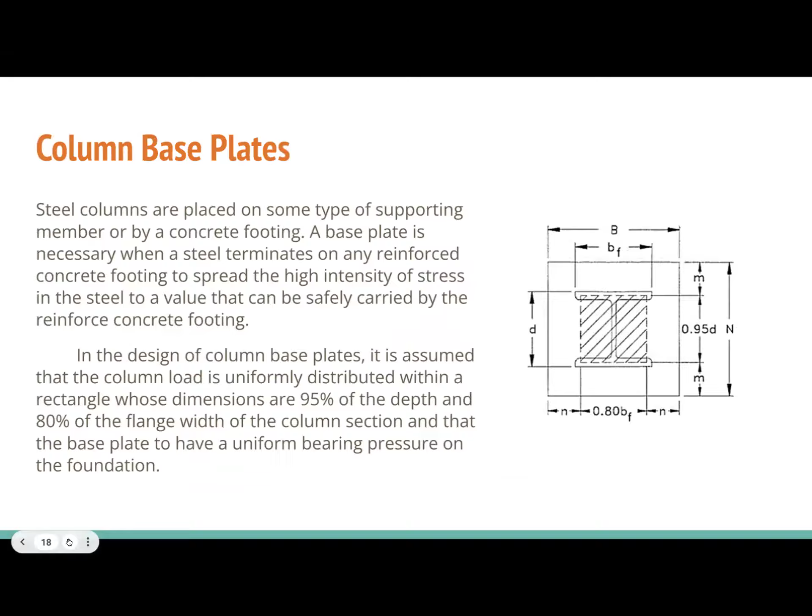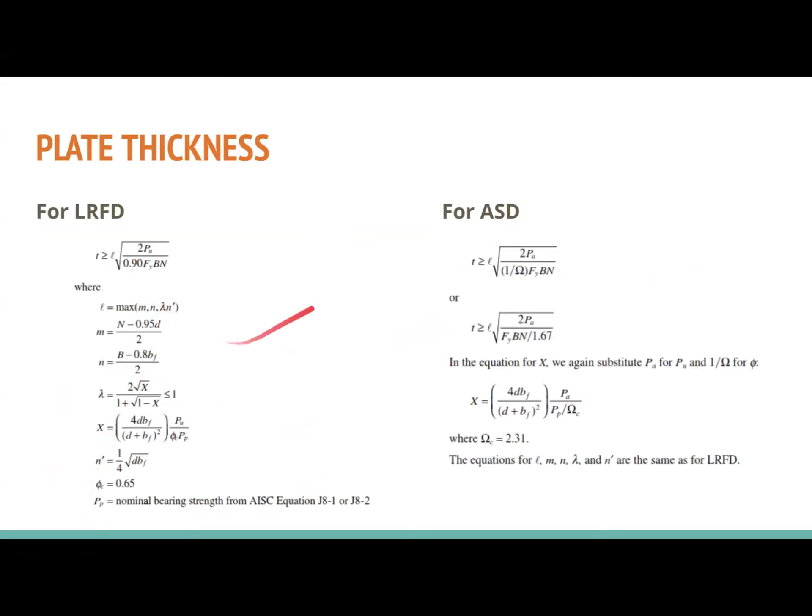So now we'll have an example. All right, so we'll solve this one. So we have this here, the problem. Let's solve this manually. A W250 by 73 is used as a column and is supported by a concrete pier. The top surface of the pier is 450 mm by 450 mm.

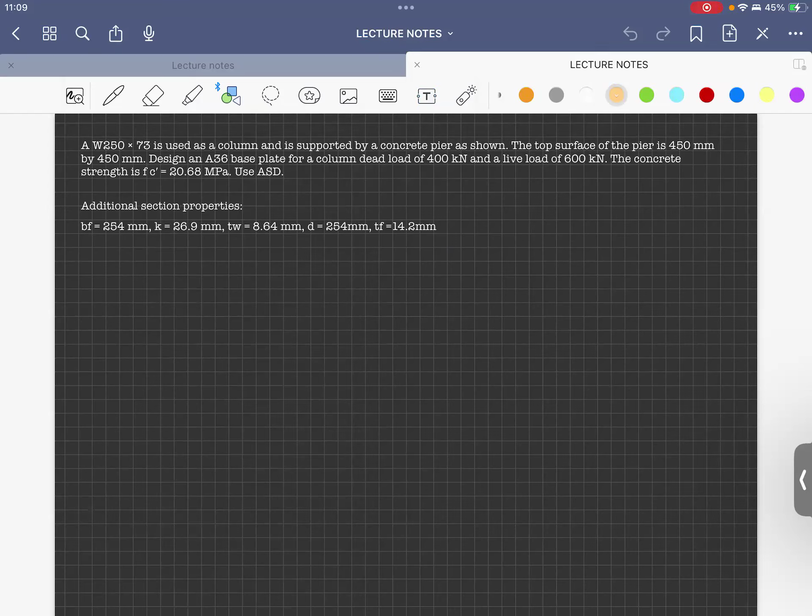The dimension of the concrete pier is already given. So let's draw yung ating concrete pier. So 450 by 450, say ganito. So 450 by 450 concrete pier. 450 by 450.

Then design an A36 base plate for a column dead load of 400 kilonewton and a live load of 600 kilonewton. The concrete strength is FC prime 20.68 megapascal. Use ASD.

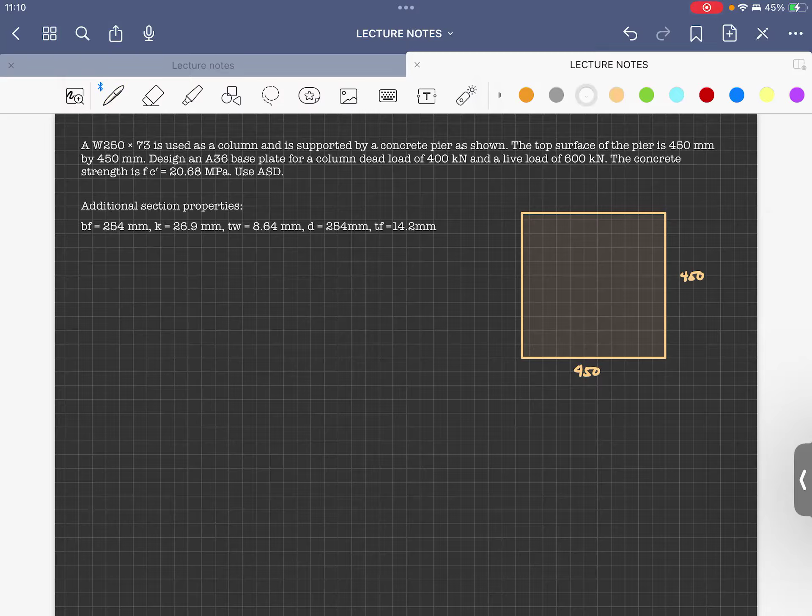So since this is ASD, what we're going to use is the PA or allowable load. So you don't need the load factors. For your PA, just change the values. We have PA. We have 400 plus 600 kilonewton. So we have 1,000 kilonewton. So this is the allowable load.

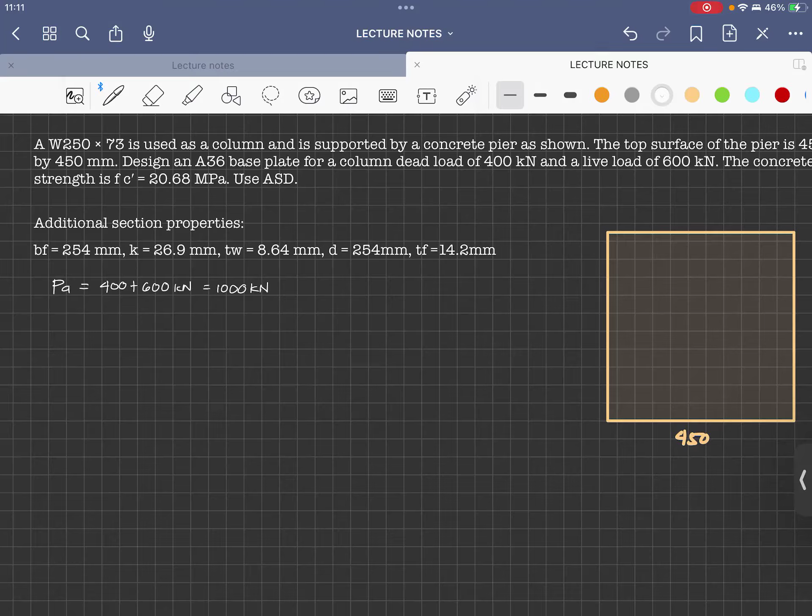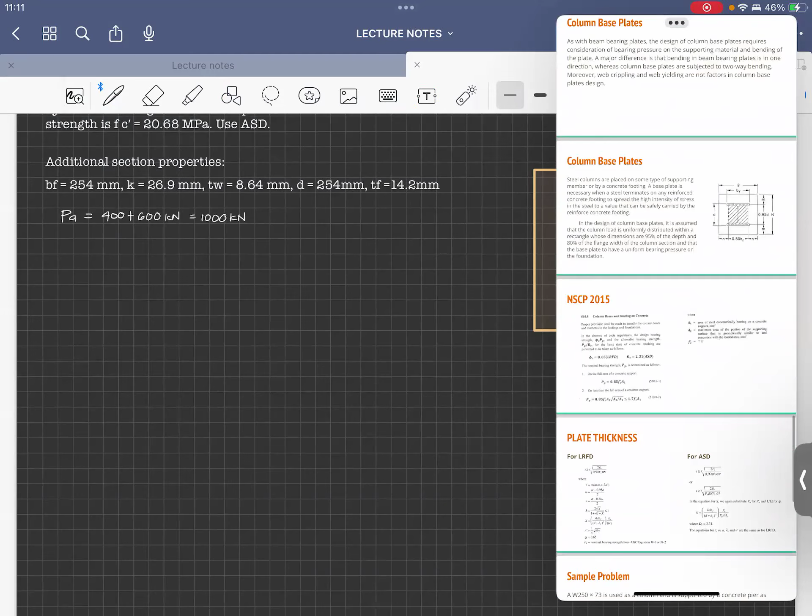Now, to solve for the area, balikan po natin yung ating presentation para may guide tayo. Tingnan natin, column base plate. So if you can see here, ayan. Since we have the area for your concrete, what we need naman is the area for your column base plate. So ang gagamitin natin is the second, less than full area of the concrete support. Since we have ASD, sulat natin.

We have PA is equal to, I'm just going to copy this first, 0.85 FC prime, area 1, square root of area 2 over area 1. Now for this to be PA, I'm going to divide this by your omega. So for your PA, we have 1,000 kilonewton, or 1 times 1,000, or 1 million Newton. Dapat kasi naka-Newton siya, is equal to 0.85 FC prime is 20.68.

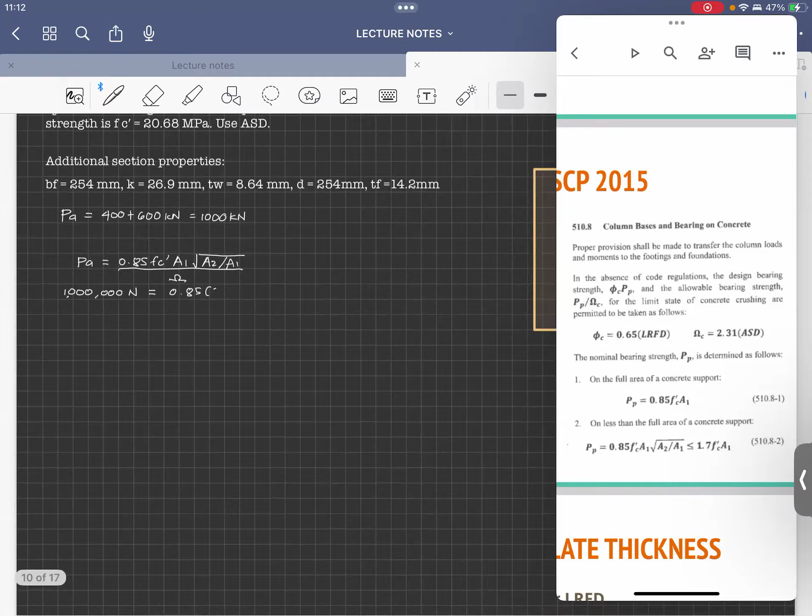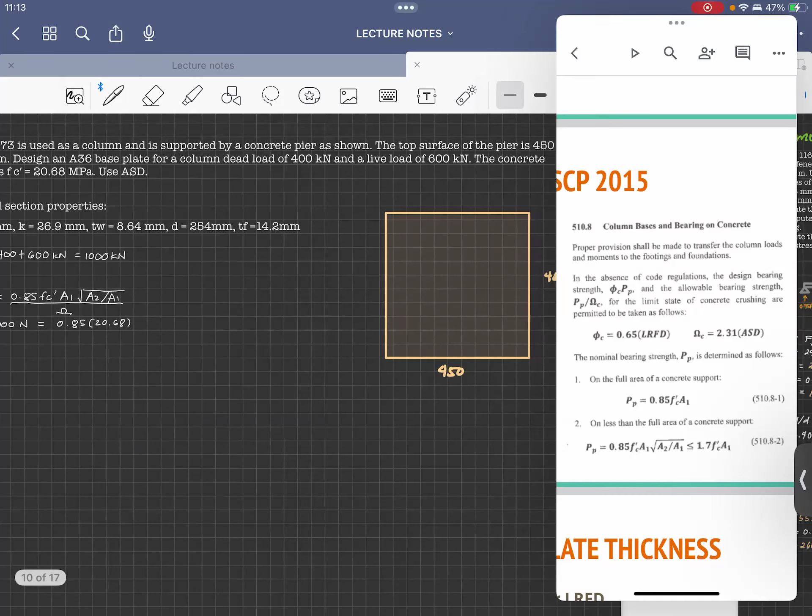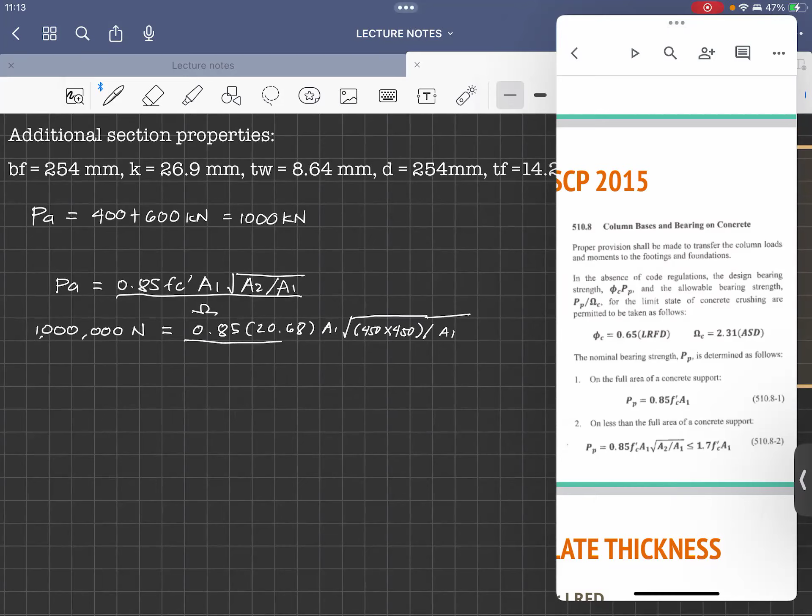Lagyan natin. Area 1, this is what we are trying to solve. Since magdi-design tayo, we need the area of the column base plate. Kasi di ba, we have here na the area of the concrete, so what we need is the area now of the column base plate. So area 1, ito po yung nawawala. Square root of area 2 is the area of the concrete. So area ng concrete is 450 by 450. Then i-divide natin ang area 1. Tapos this equation is divided by our omega, which is equal to 2.31.

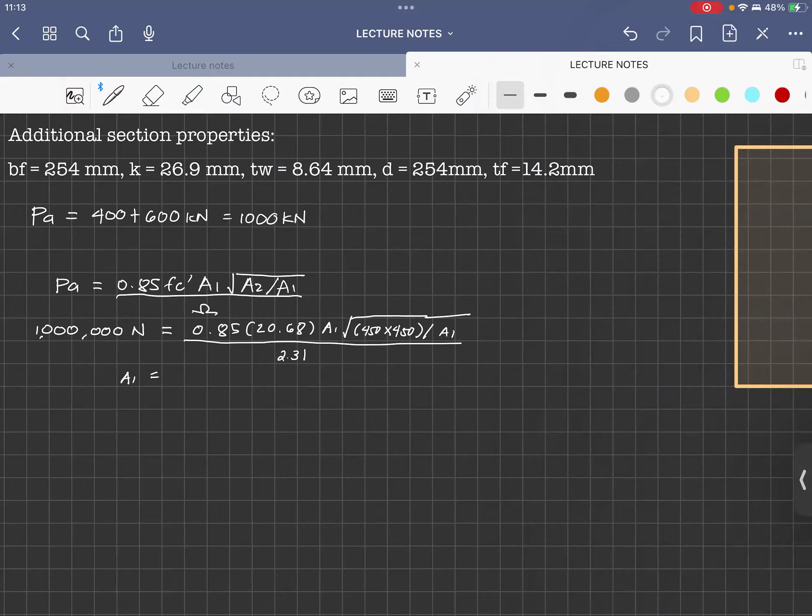So use your calculator to solve for your area 1. Million times 2.31, para diretso tayo. 0.85, 20.68, square root of 450 times 450.

So we have 85,282.52. Now let's see. Let's please take note here. The value of this should be

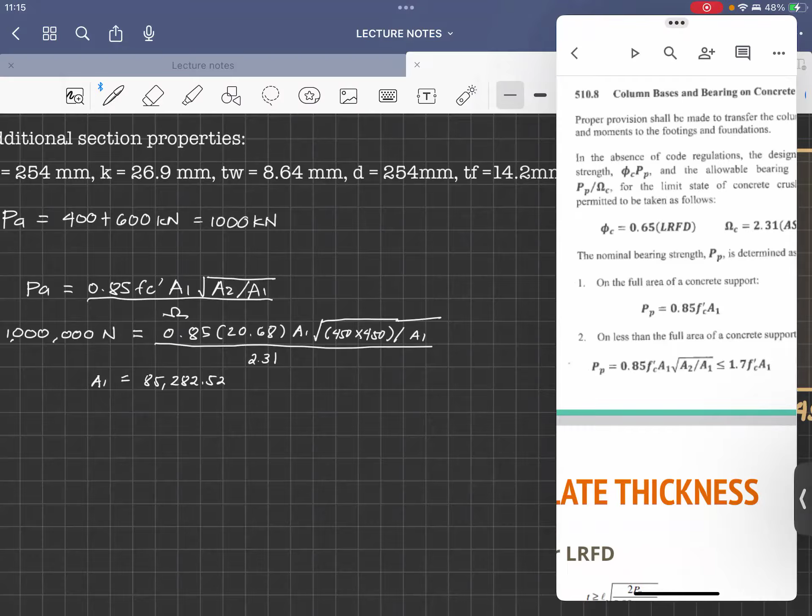less than or equal to 1.7 FC prime A1. So since this is our A1, let's check. To check, we'll use 1.7 FC prime A1. So for A1 we have 1.7 times FC prime, 20.68, so let's put 1.7 FC prime A1 here first.

Do not forget, this will also be divided by your omega. So, 20.68 times area 85,282.52 divided by omega, which is your 2.31. So we have 1.7 times 20.68 times 85,282.52 divided by 2.31.

129. Let me double check. So 1.7, 20.68, 85,282.52 divided by 2.31. So it's quite large.

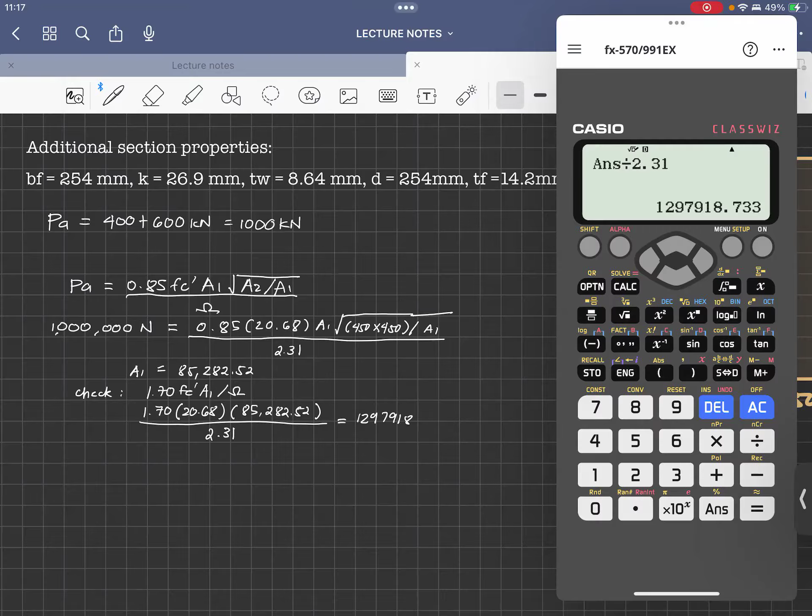1,297,918.733. So let's go back here. Since it's large, this is greater than your PA, which we'll set as 1,000. So 1,297,918 is greater than your PA, which is 1,000. So check, correct siya.

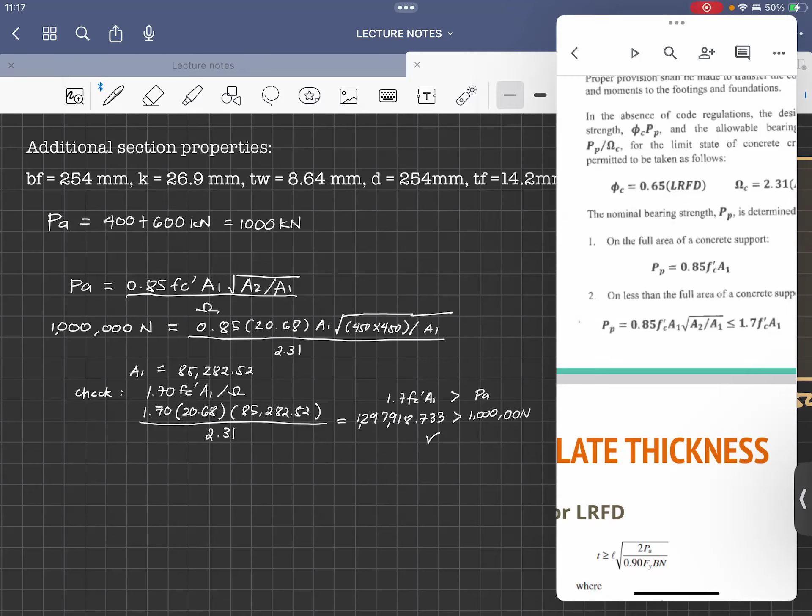Okay, so we have 1.7 FC prime A1 is greater than your PA. So that's our check. Based on this equation, so it's correct. Another thing you need to check is this is in mm squared, so that would be the area of the base plate.

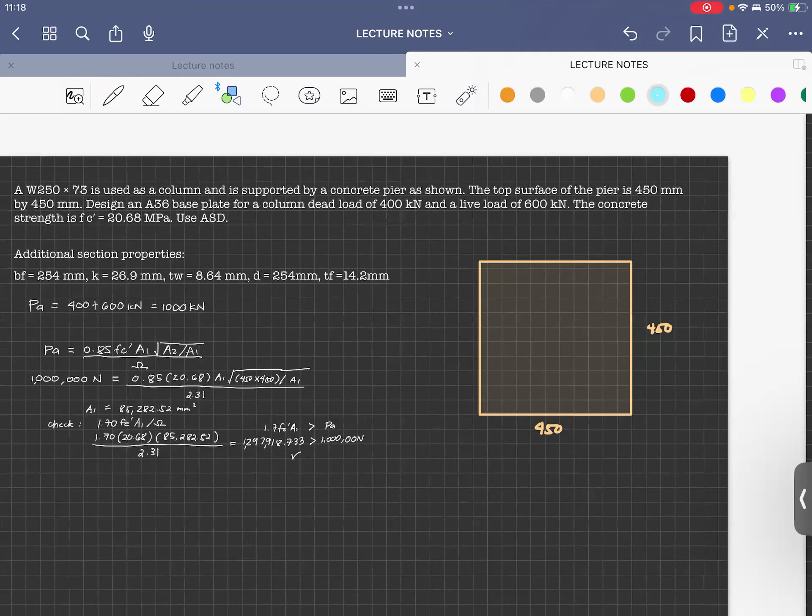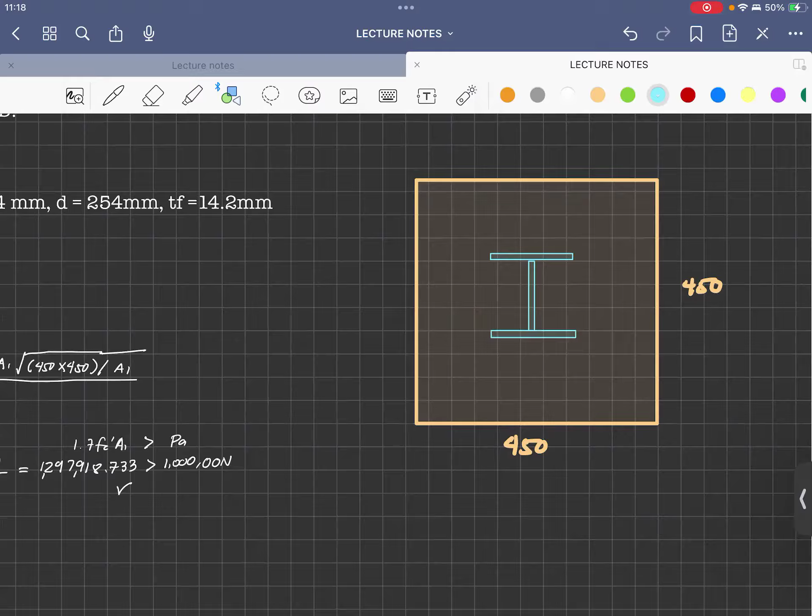So if we look at this, if we are to draw the I section, the BF is 254. Let's do the I section. If this is our cross-section or area of the base plate, or the column base plate, it should be greater than the area of this, because this should be the shape of our column base plate. Let's check.

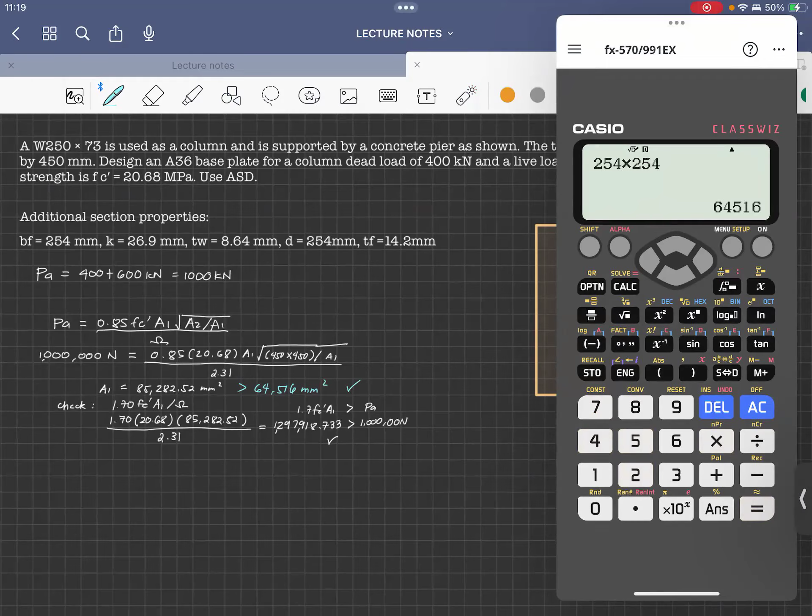So we need to multiply BF and then D, just to check. Your BF is 254, your D is also 254. So, squared, that's 64,516. So it's greater than this, 64,516 mm squared, so it passes. Again, what's the 64,516? That is the area of your column.

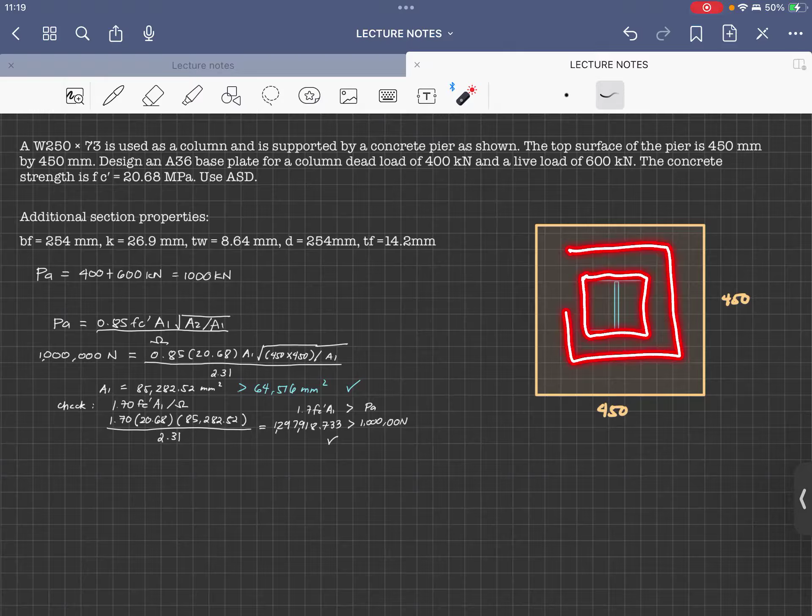So again, if we want to distribute the load of the column, our column base plate should be larger than the area of our column. So since 85,282.52 is greater than 64,516, it's correct. Check it here.

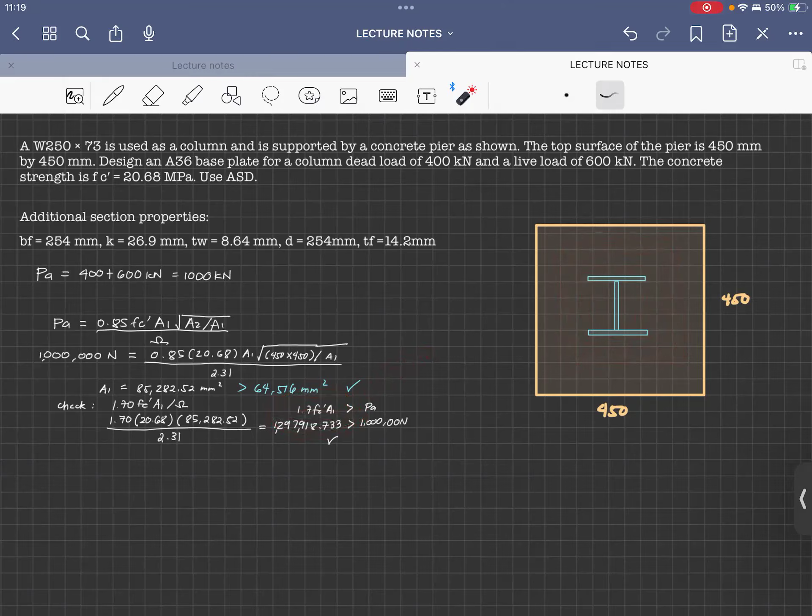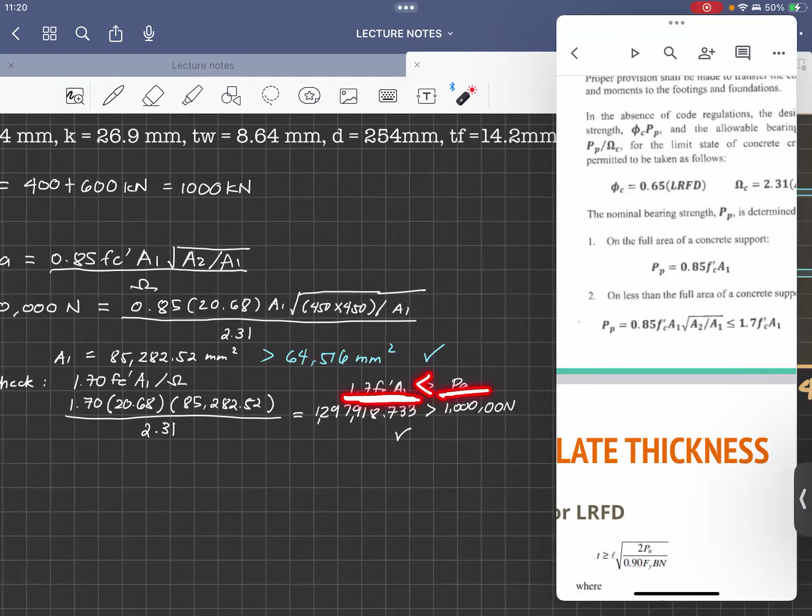Then you also need to check it here because this is in our code. So another thing, what would happen if, for example, our answer here is less than PA? Because that's what's in the code. Let's go back. It should be that 1.7 FC prime A1 is greater than our PA. So if it's smaller, what do we do? What we do is, instead of using this to get your A1, we replace it since it's wrong. We make PA equal to 1.7 FC prime A1 over omega.

And then we compute the new area 1. So if it's smaller, or the equation isn't satisfied, we equate PA to 1.7 FC prime A1, and then the area there would be the area that we need to use. That is how we double check if it's okay.

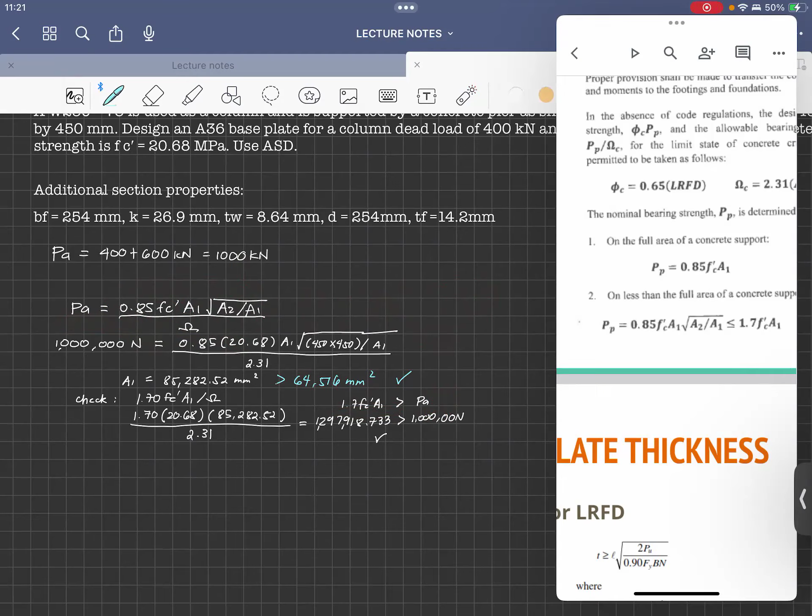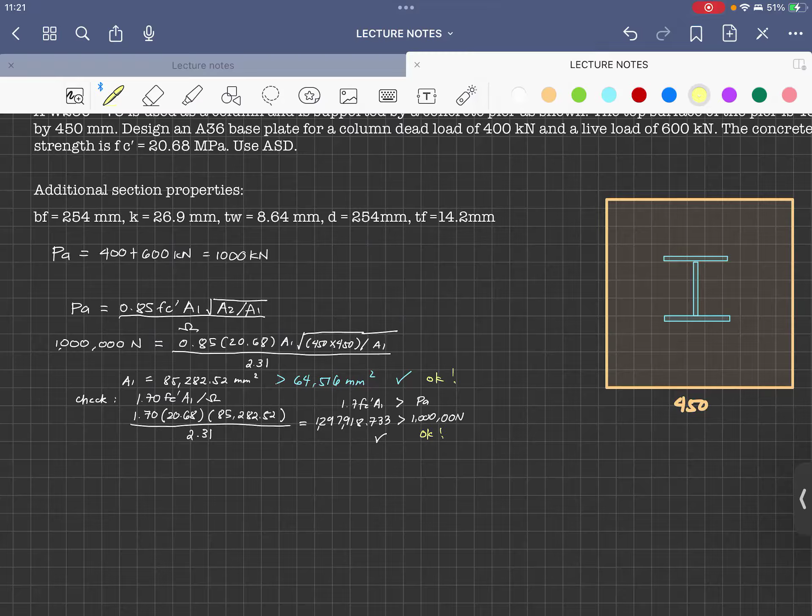So let's mark it okay. So this is okay, then this is also okay. So if that's the case, and we have the area, we can now try. So let's say, since it's square, square root of 85,282.52 is equal to 292.

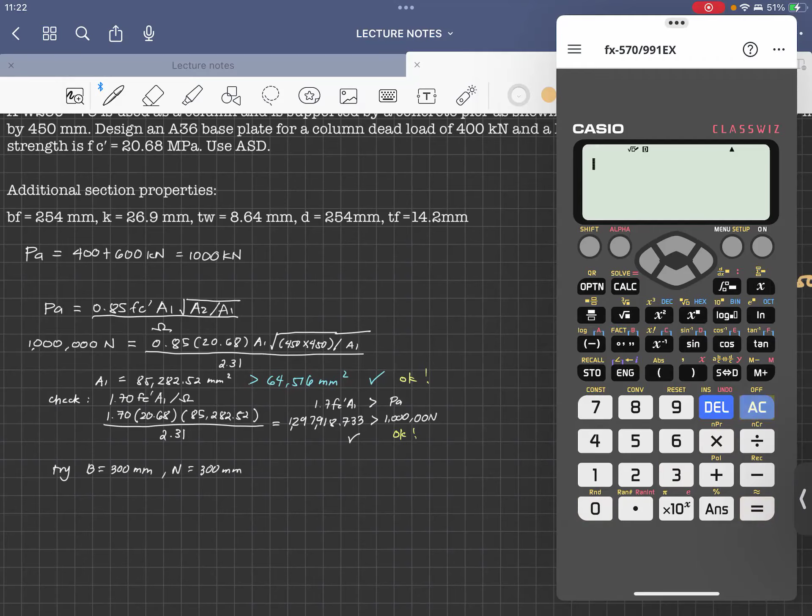So let's say we make it 300 by 300. Try B equals 300 mm, and N also equals 300 by 300 mm. Alright, so it passes. 292, so let's try B and N. If we make the area 300 times 300, of course it's also greater than our 64. So it still passes. So 300 by 300, that would be the dimension.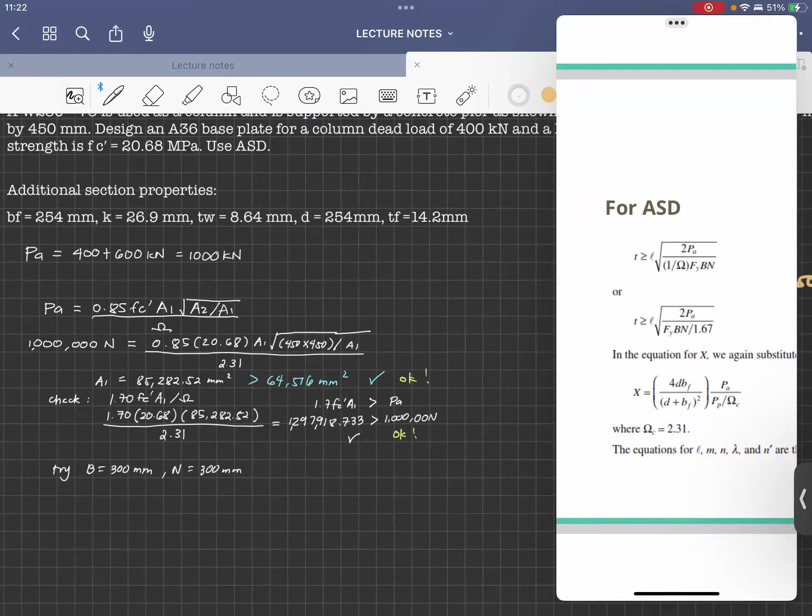Next step now is solving for your T. So, we're in ASD. Again, what we need to solve first is this letter L. So we're going to choose among our M, N, and N prime. Let's go back.

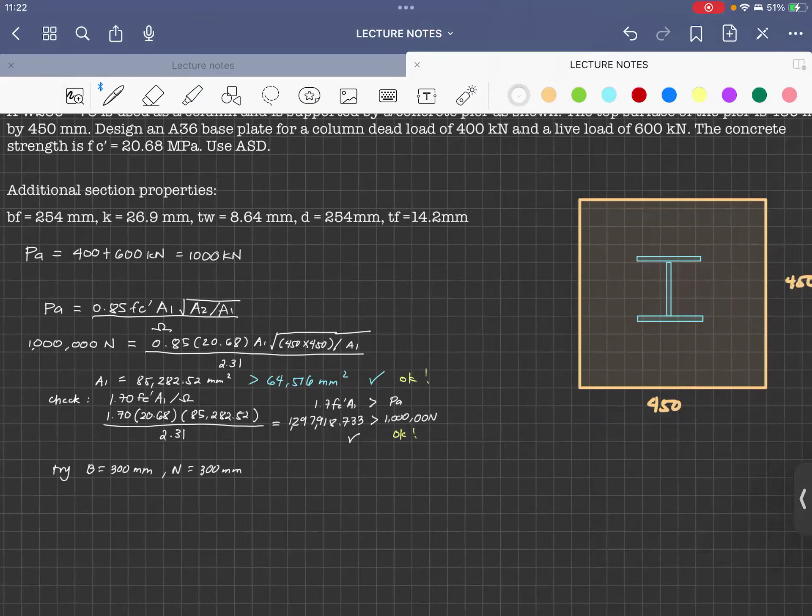So again, as mentioned earlier, instead of memorizing, it's better to just draw our figure. So here, let's put in the dimension. We have your BF, that is 254, and this is also 254 depth. Now I'm going to draw a line, 0.95 D and then 0.8 BF.

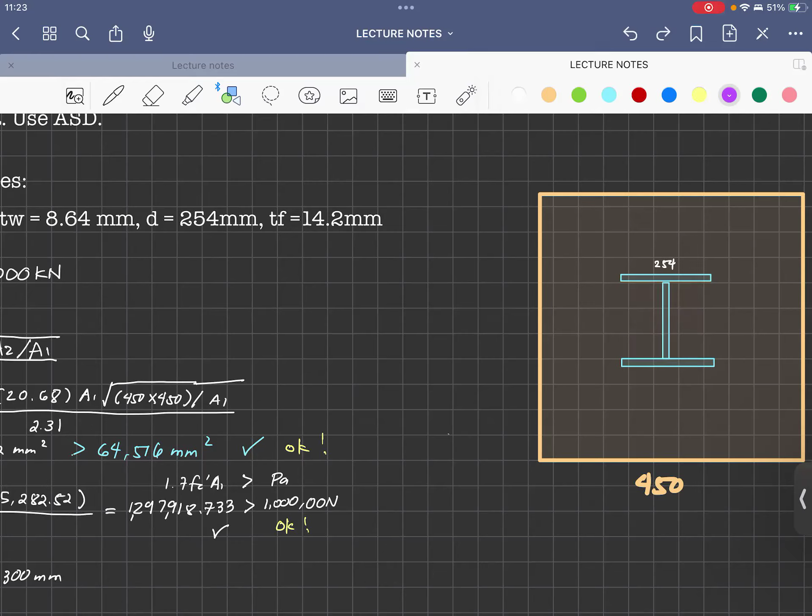Sometimes, supposedly, let's say this is it. So you have this.

Then let's draw the base plate, 300 by 300. And this is 300 by 300.

So if you remember, our depth is 254. So this is your D. Then, in terms of D, that's it.

So parallel to our D is your N. Then parallel to our BF is your B. This is your B. And this is your BF.

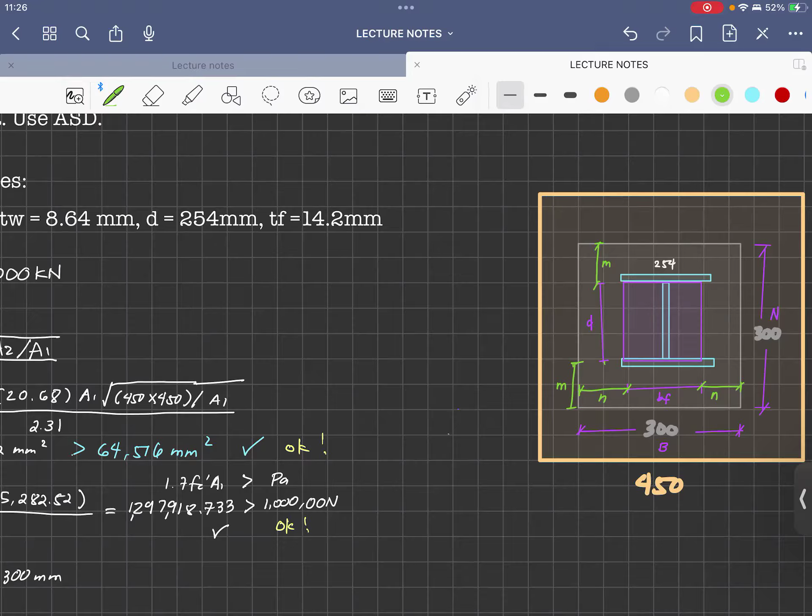So, to solve now for the value of M and N, without using the equation, let's just look at the figure. Let me move this to the other side. So let's compute, for example.

Let's compute for your M. To compute for this value, what we do is 300 minus D, and then divide it by 2 to get your M. So you have

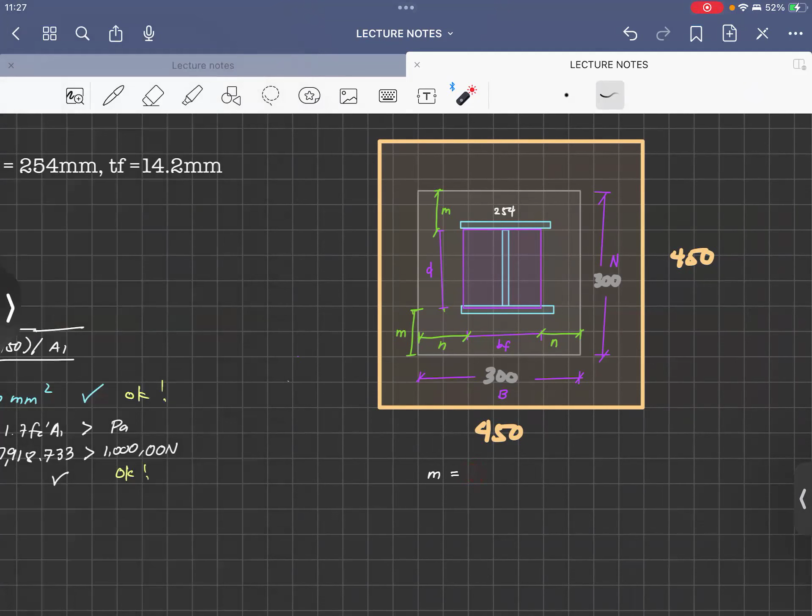300 minus your depth, which is 254, divided by 2. So that is your M. So you have 23 mm.

Then for your N, the same process. To get these, what we do is our B, which is 300, subtracted by BF, then divided by 2 to get your N.

So the same value actually, 300. The BF is also 254, divided by 2. So the same value actually, you also have 23.

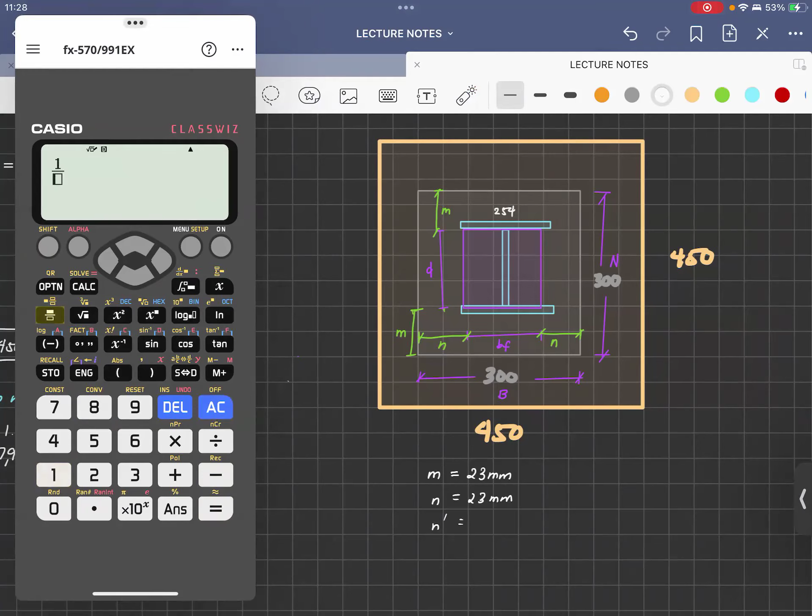And then the other one is N prime. So you have 1/4 square root of D times BF, so 254 times 254. That's the equation. So you have 63.5.

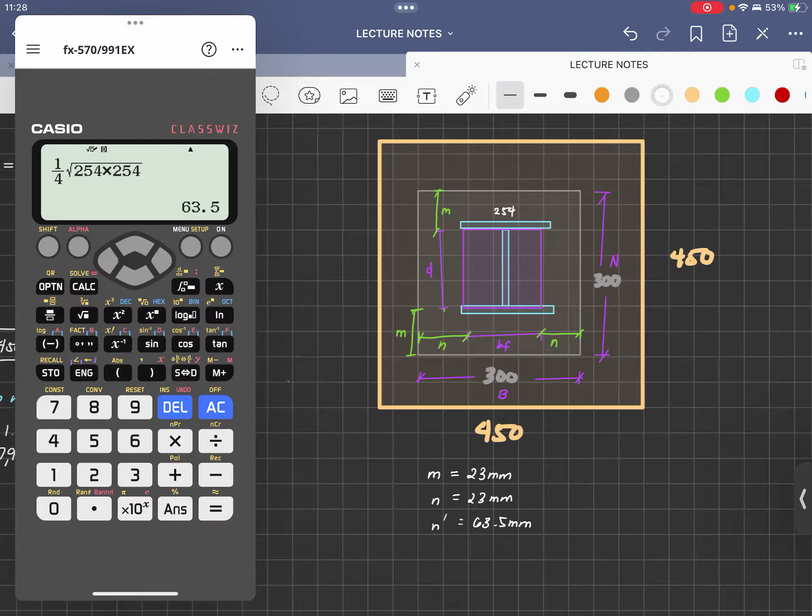Again, according to the NSCP code, we need to choose the maximum value. So in this case, the larger value is your 63.5. So that's what we'll use.

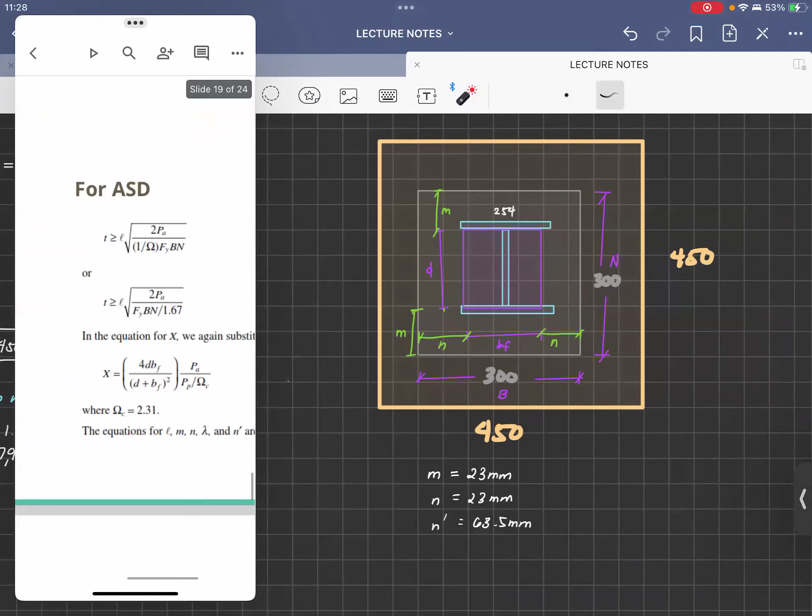So for the thickness, let's write it here for your T. So we're going to choose this 63.5 as your L. So let's copy the value of your T.

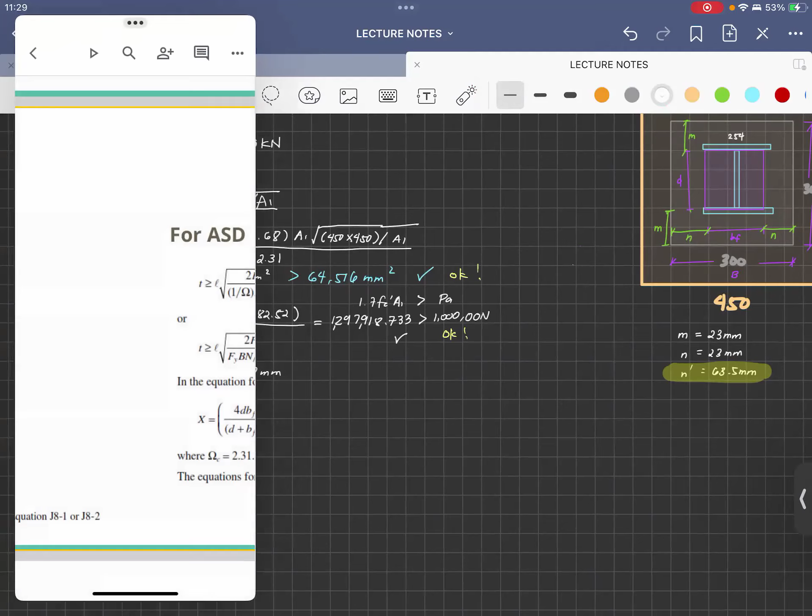So for your thickness, we have the equation, let me put it here again. So you have T is equal to N prime times square root of 2PA, all over FyBN, divided by 1.67.

I'm going to write it. N prime is 63.5, square root of 2. Your PA is 1,000 kilonewton or 1 million newton. All over Fy.

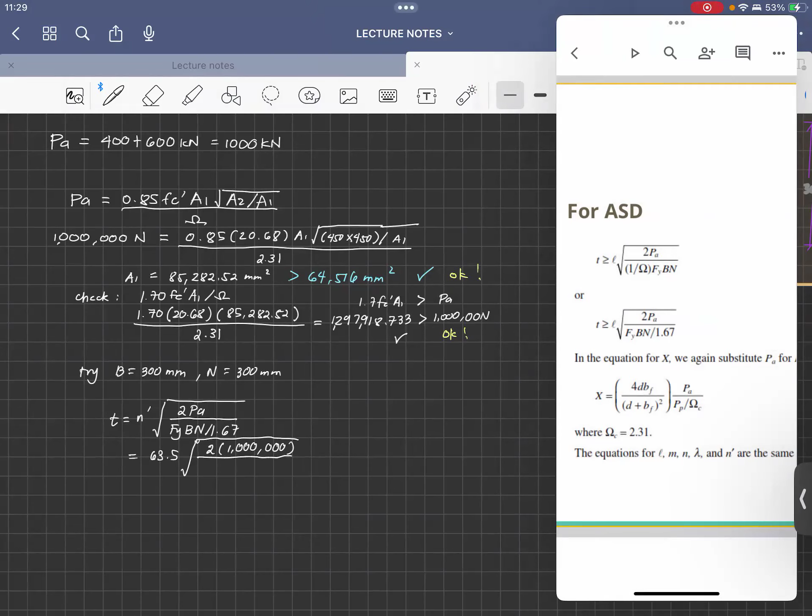Let's see, this is A36 grade steel, Fy is 248. Your B is 300. N is also 300. And then divide by 1.67.

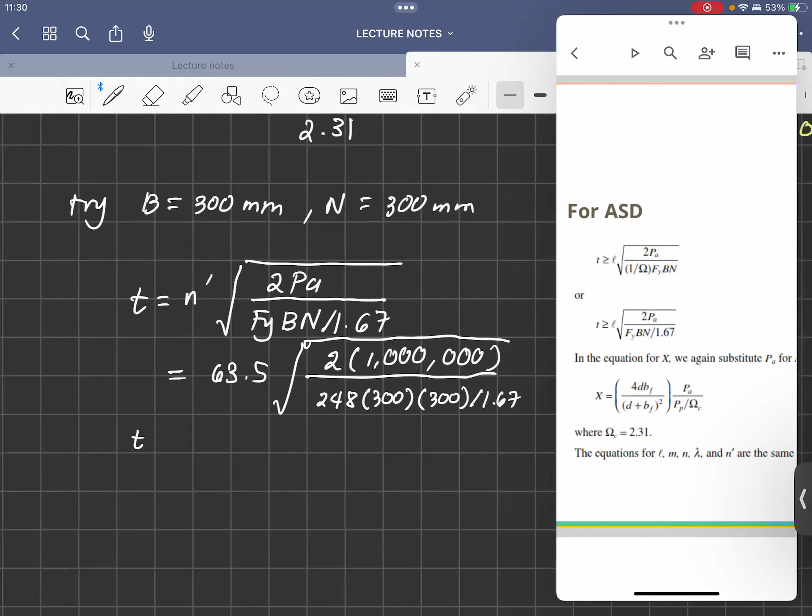So the value of T is equal to 63.5 times square root of 2 times 1 million, divided by 248 times 300 times 300, divided by 1.67, which equals 24.56 mm. So what we'll do is round up to the nearest multiple of 2.

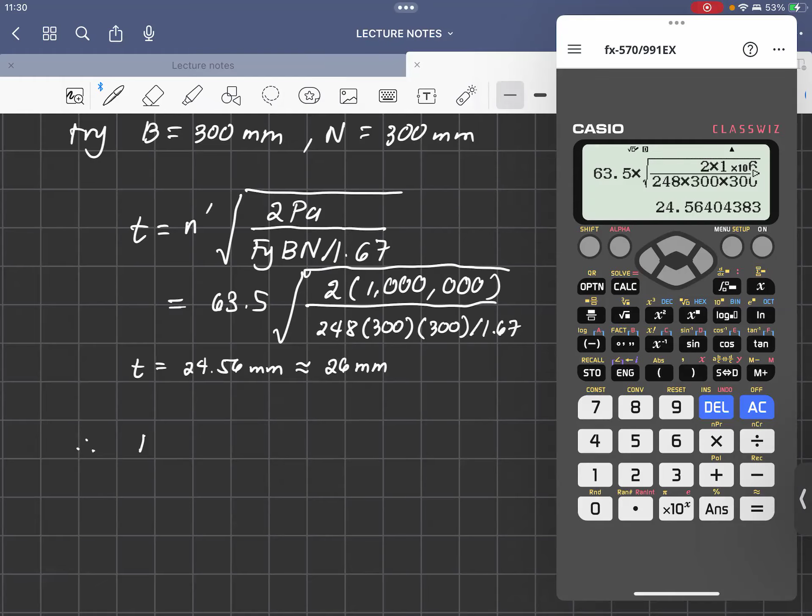So let's make it 26 mm so it's a whole number. So therefore, our base plate is 300 by 300 by 26 mm. This will be the dimension of the base plate that can carry the 1,000 kilonewton load.

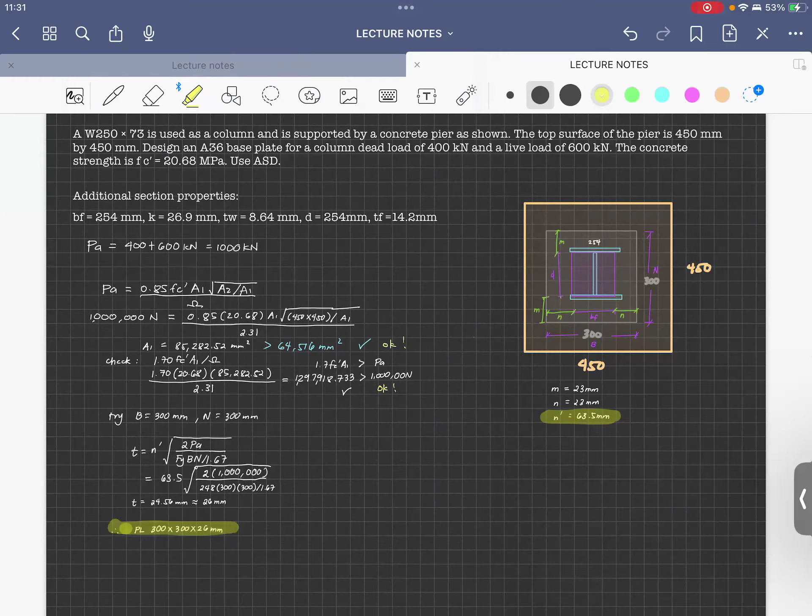So that's our final answer. So that's the dimension of this base plate in gray. So 300 by 300, and the value of your T is 26. If it's not square, just ratio it.

For example, if it's not square, to get this B and N, just approximate it. Let's say this could be 300 by 250, or 350 by 300, etc. So that is how you design a column base plate.

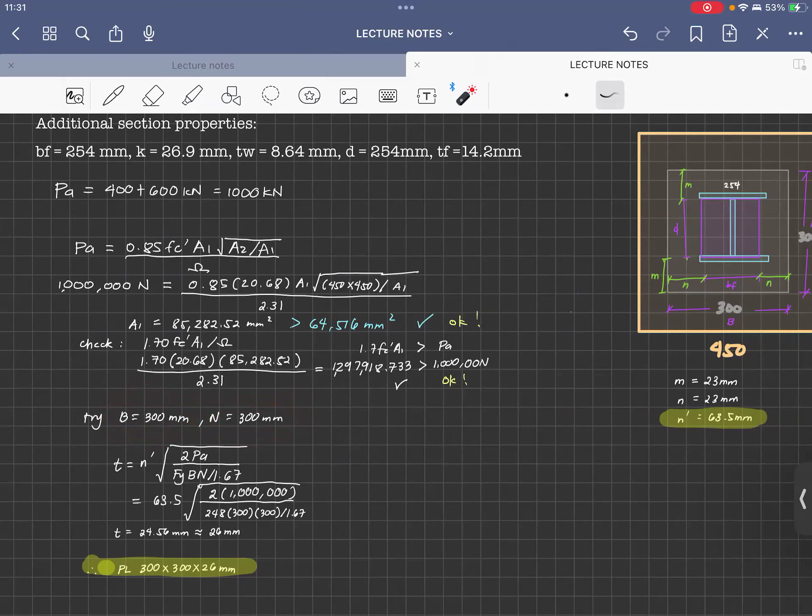So that concludes the lecture discussion for our base plate. So let me repeat, what is the process? It's shorter compared to your beam bearing plate because you don't have web crippling or web yielding.

So the first thing you need to do is categorize if the area of the concrete pedestal is the full area or only a portion. After that, compute for the value of the load, then compute for the area of the column base plate that is needed. So that concludes your column base plate.